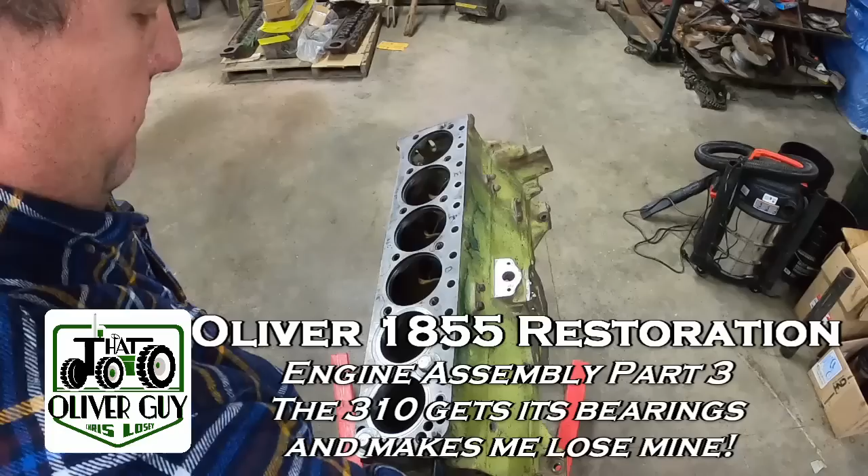Welcome back. We are going to do some bottom end building now.

Waiting for lube for those sleeves, which you probably saw in another episode. So I can put those in after the crank's in. It should be fine after checking everything else out. And the way these two popped in, I have no doubts that everything's going to go together well. I should probably lock this from turning.

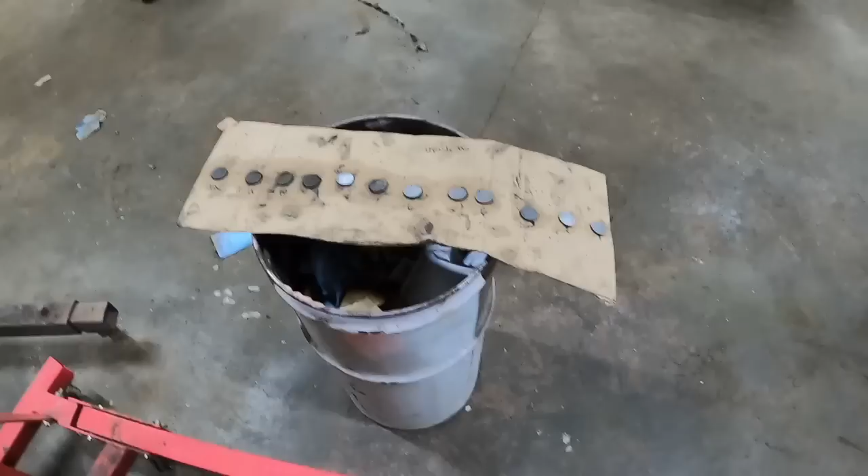So it's a lot easier to get the lifters in without the crank in the way. So we'll get the lifters in, then get the camshaft in. And I gotta clean the lifters. Generally I don't do at least the final wash on parts until I'm ready to put them together, so they're good and clean. So I'll get on that and then we'll start sticking them in there. The camshaft measured up good, so I didn't do anything to that other than clean it.

So kept the lifters in order, and that way they work against the same lobes that they were before in case there's any wear patterns or anything like that. Just took a piece of cardboard, punched some holes in, and put lifters in. That helps keep them organized on the cheap. So I'll wash up number one and then we'll put her in.

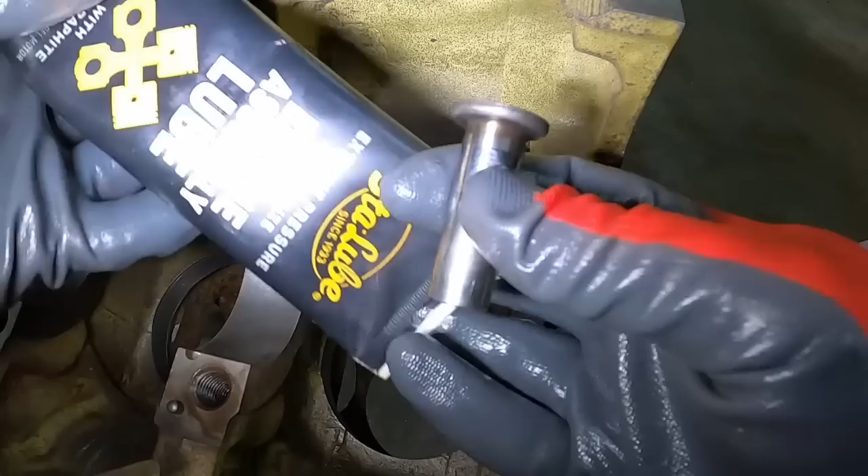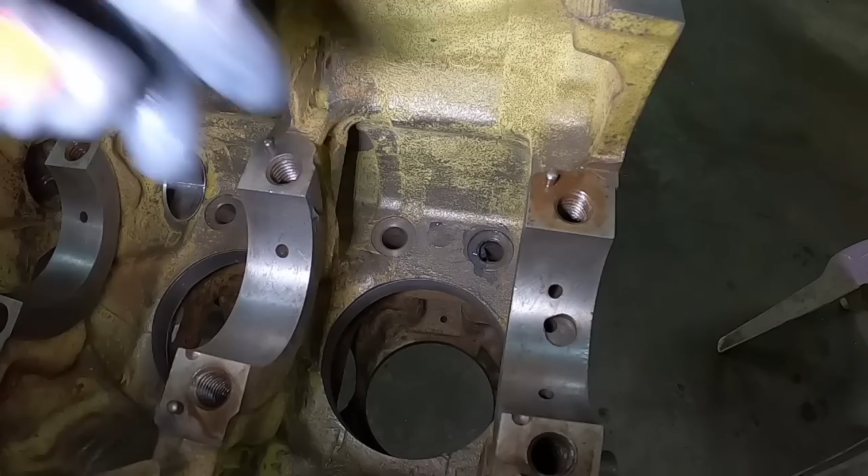Oh, I've got this, I like this one for the lifters just because it's almost grease. So it's going to stay in there. Cling on good until the oil gets circulating around in the engine. Maybe I'll put some right there for that initial startup. Now it's all slippery.

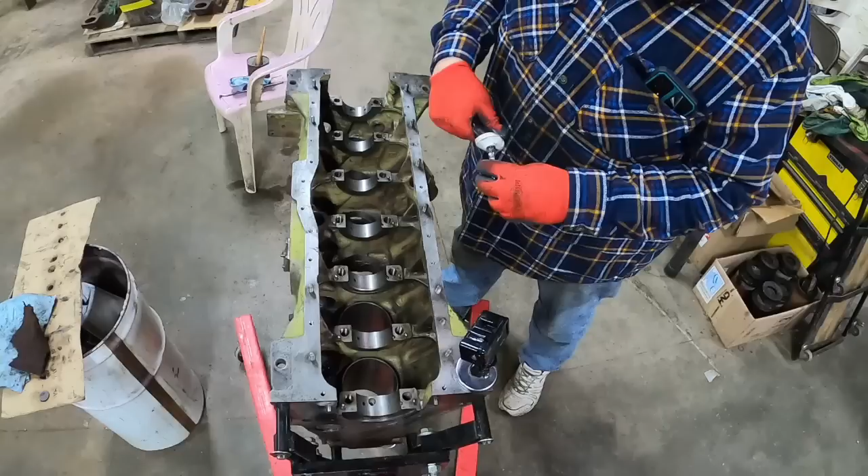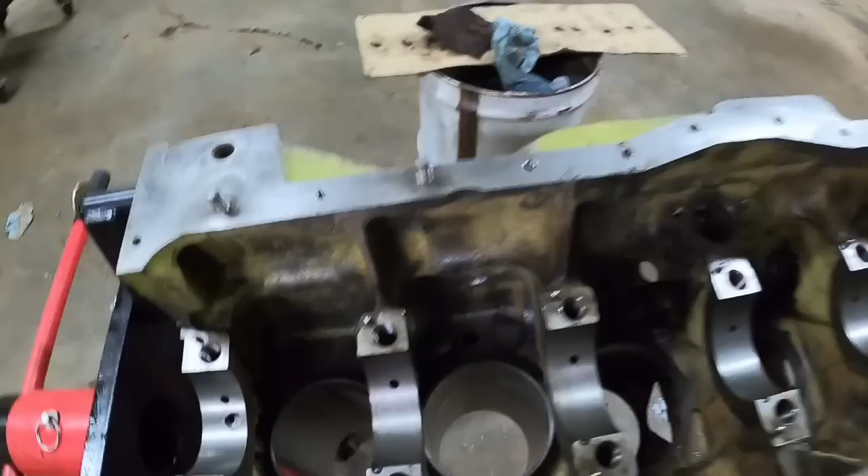Next, probably not going to see much, just because I keep getting my hand in the way. So I'll record these first two going in, and then you'll have to take my word for it on the rest, I guess. I'll put a dab on each lifter, and then in on each bearing I'll coat that. Then I'll coat the camshaft before I slide it in.

Oh, here is, this is the gear that drives the oil pump. I definitely want to make sure that's lubed up ahead of time. It'll be sitting down in there once it's all assembled. I'm going to put lube on every lobe, smear some on the bearing areas. That is in. All lubed up.

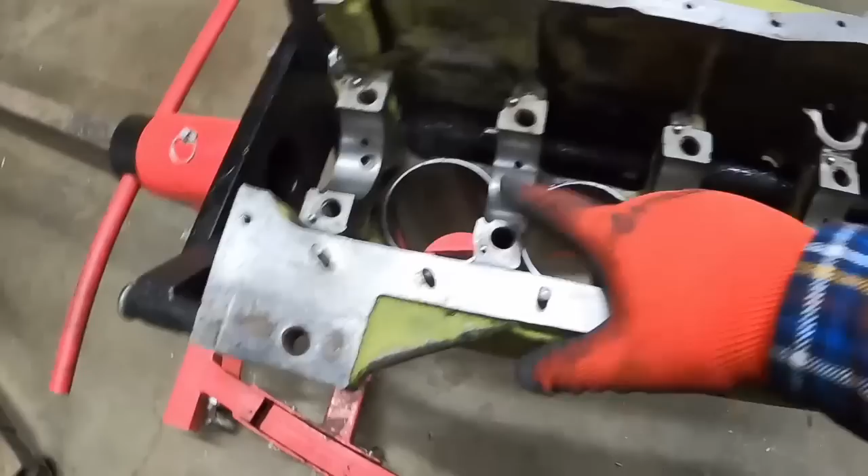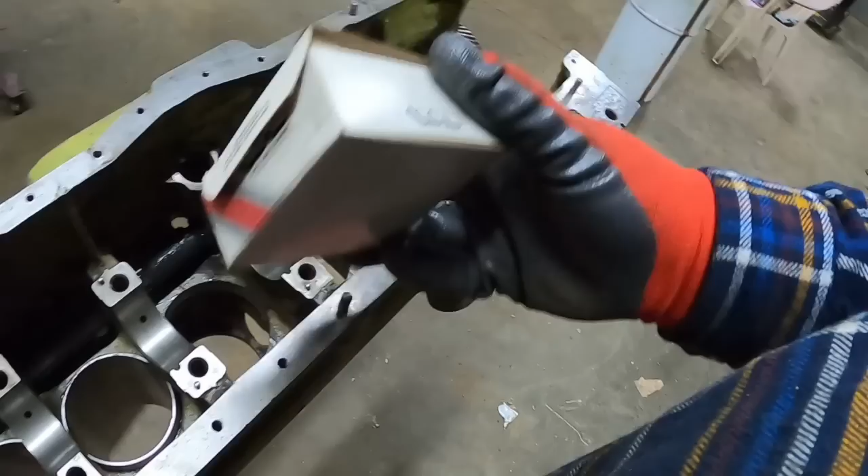Crank got ground to 20 under, and Larry's Valac down in Texas had a set of new old stock 20 under bearings, you know, from the good old days when stuff was made in the USA. Of course I say that. Let's see what the back of the shell says. Let's see, 20 over Oliver, or no, Clevite. Doesn't say if it's made in the USA.

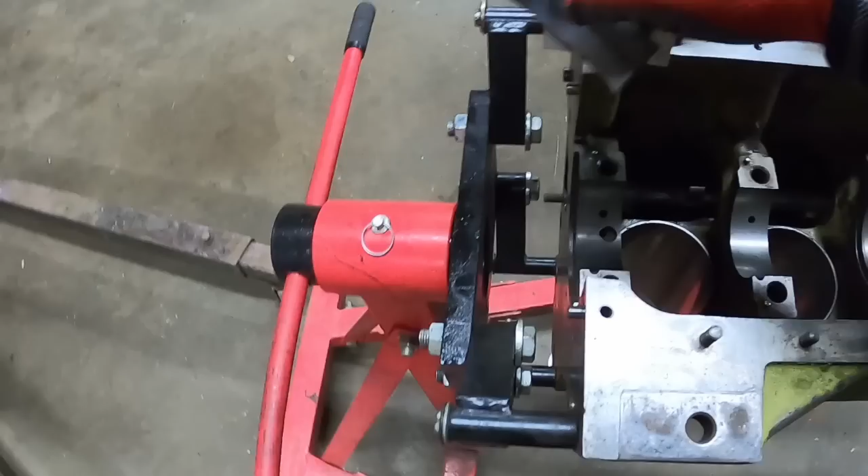Well, that will be the bottom half because it has no holes in it, which is currently the top half. Looks like they need a little wiping off. So I will number these just to keep the two halves together. We'll Plastigauge them before it's all said and done. Tang there. One more check for any foreign stuff. Even a little speck of dirt can push that bearing up 1/1000th and make it start dragging.

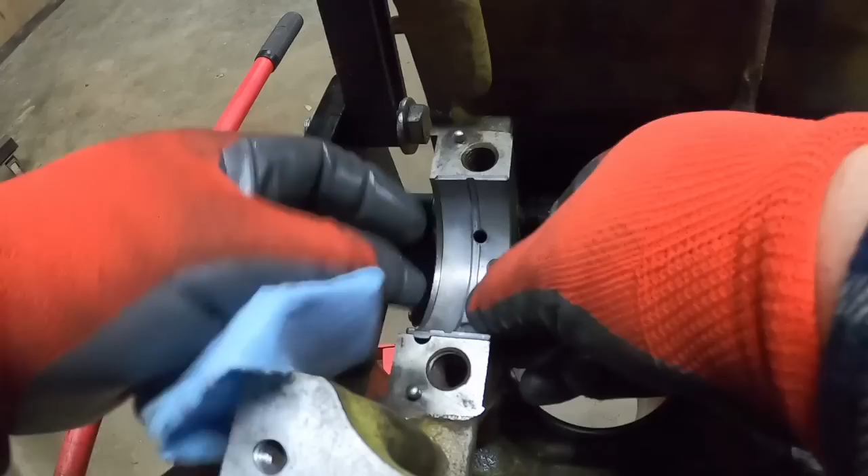Okay, the holes should all line up. They should. Now this has got a countersink hole, so that'll let oil through there. So that'll be okay. Let's line it up. And there's a hole there, but it goes to nowhere, so that's fine. So I'm gonna write 7 on the back of this one. Keep them paired up.

If I was really doing this right, I would measure the bore with a bore gauge, and well, mount the bearings in, clamp them down, measure it with a bore gauge, measure the crankshaft, and then the difference is my gap, my tolerance, my space, whatever. There's got to be some space for oil and for it to turn. But I'm gonna lean towards that they knew what they're doing, and we will check it with Plastigauge, which we'll see how that works here in just a moment.

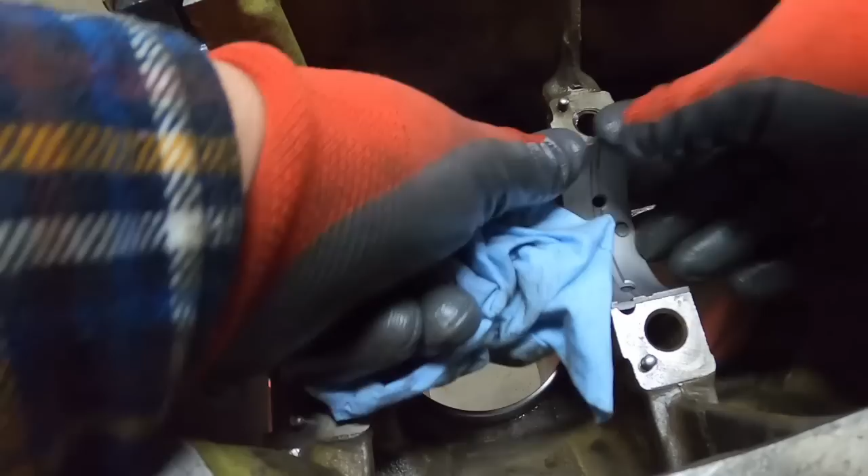Next up is the thrust washer, which wraps around and takes up the end play or the thrust of the crankshaft.

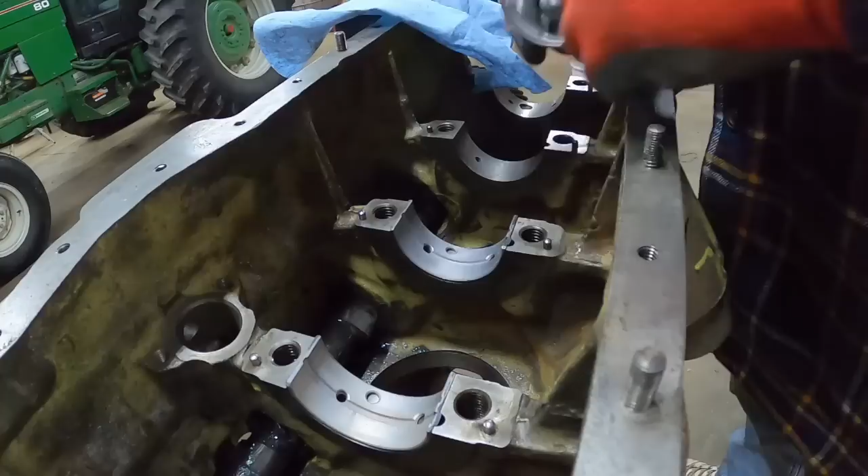It does say upper, which looks like lower because the block's upside down, but... Oh, I use this Permatex Ultra Slick for the actual main bearings and rod bearings. It's pretty darn thick and sticky. Used to use engine oil, but I just like this stuff, the whole sticky, staying in there, staying where you put it.

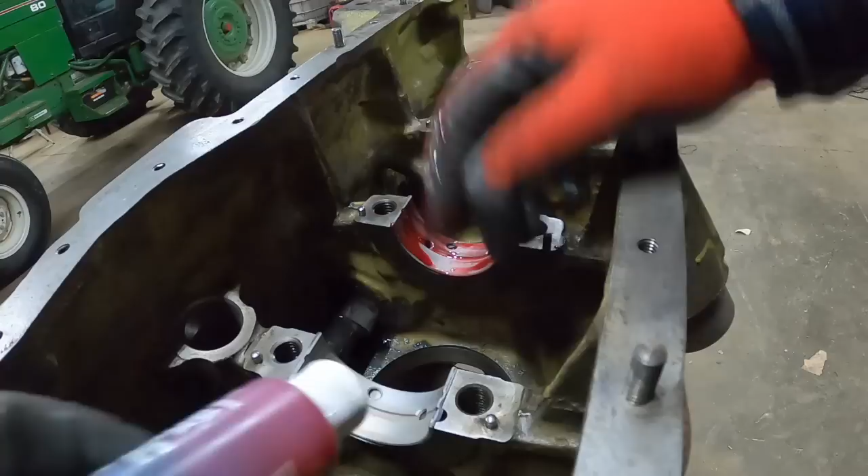It's a little more fluid than that gray stuff that I put on the cam. So I figure it won't make for harder cranking when I'm first trying to fire it up. It's sticky. That's what we want. Want it to stay in there as long as possible until the oil gets flowing. Gotta get the sides of the thrust bearing. Okay, let's move you guys up out of the way so I can have plenty of room to set that crank in there.

And I might as well get the camshaft timed up. There, just had to break that suction. There's the C there. And I missed. And I missed again. That time she lined up. C to C. Oh. C to shining C.

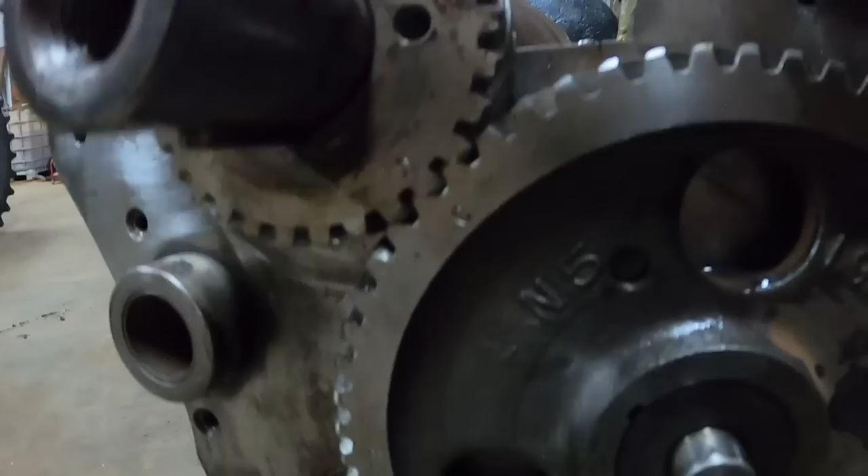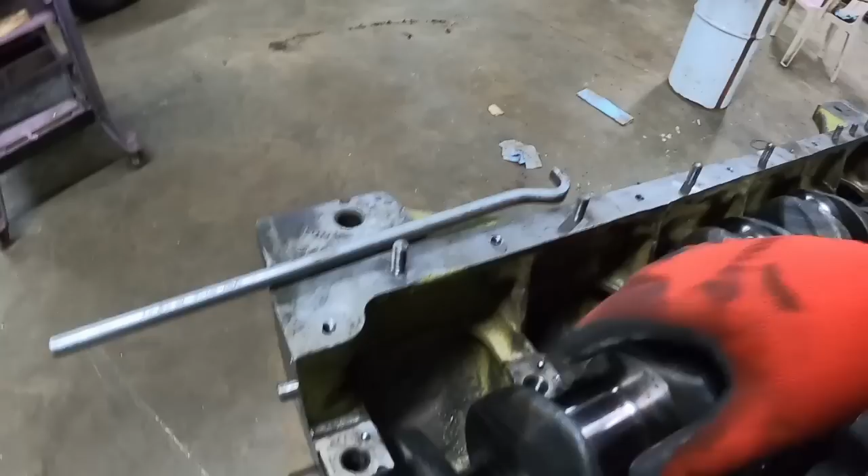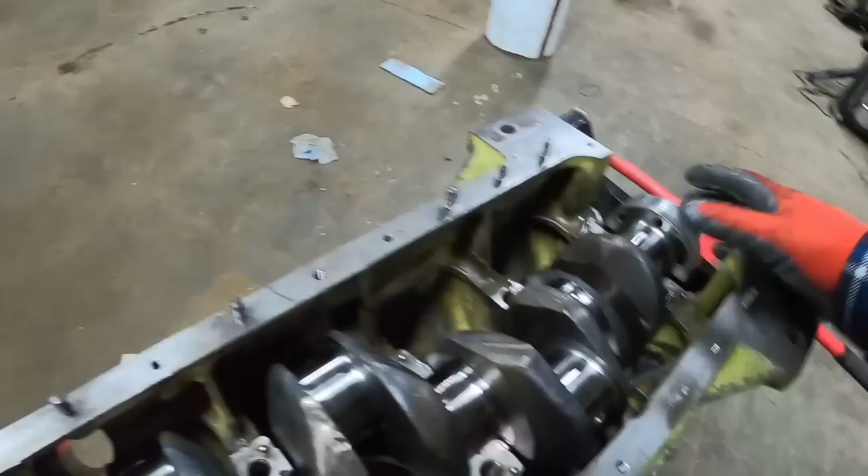All right, now the next process of starting to Plastigauge. We will start with the thrust bearing, and then I can check the thrust clearance on that, the end-to-end play, before we get any farther. So far, so good. It turns. So clearance is supposed to be 1.5 thousandths to a max of 4.5 thousandths. So I've got red Plastigauge, which goes from 2 thousandths to 6 thousandths. And I guess if that doesn't come out right, we'll throw a green one in there.

But what it is, if I can get it open, is a piece of plastic, and we're gonna gauge with it. You break a piece off, and you set it in there. I like to run it a little bit of a diagonal, get a little more space. And then we need to get the bearing in the cap the right way, so the tang is engaging there. I want to watch the dowel pins, line them up. I'm going to put a little more of that sticky lube on here. Then we just set it on there and torque it down. And I should have left well enough alone because it stuck to the bearing.

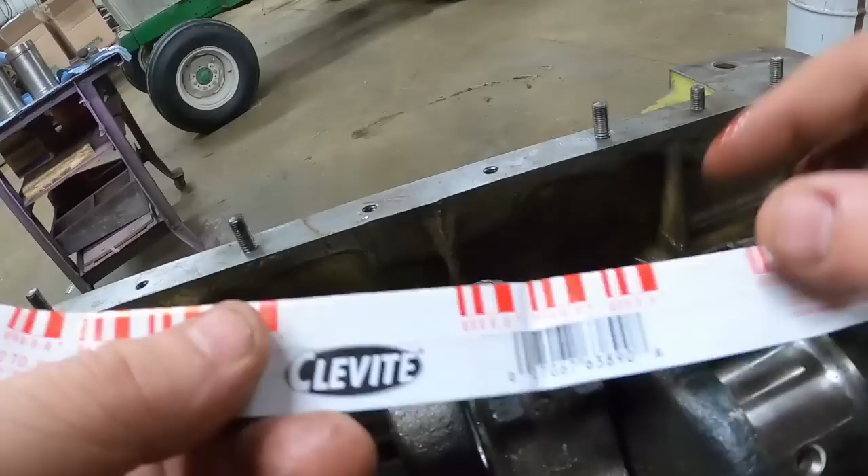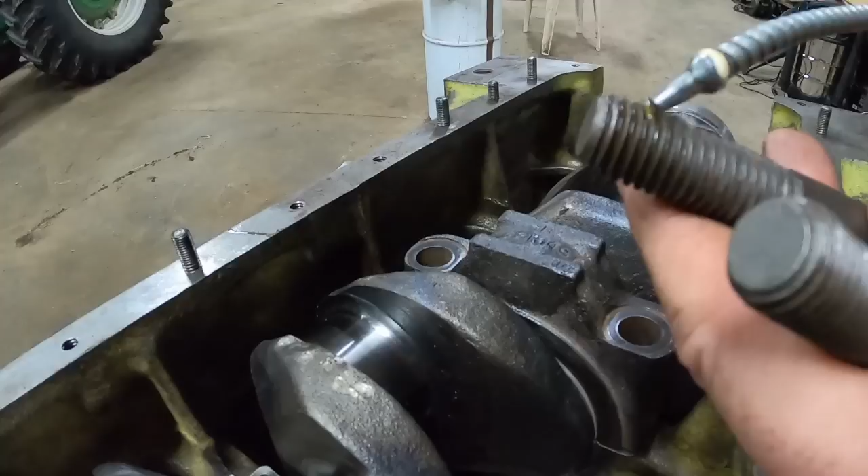What will happen is as that gets clamped down, that plastic will get squished out. Then you just hold this up to it, and however wide it is, is how much clearance is in there. The tighter the clearance, the more it squishes it down and makes it wider. Pretty simple in concept. So let me grab a couple bolts and look up the torque for that, and we'll get going. A little engine oil on the threads to lubricate those.

In an effort to make this a little quicker for now, I will use the good old-fashioned bar. Book says 130 foot-pounds, 129 to something slightly higher than 130, so I'm just going to go for 130. There's 120. 130 there. And 130. Now we go back the other way. See if my torque wrench shows in reverse. It should. That's weird. It only took like 120 foot-pounds to break them free.

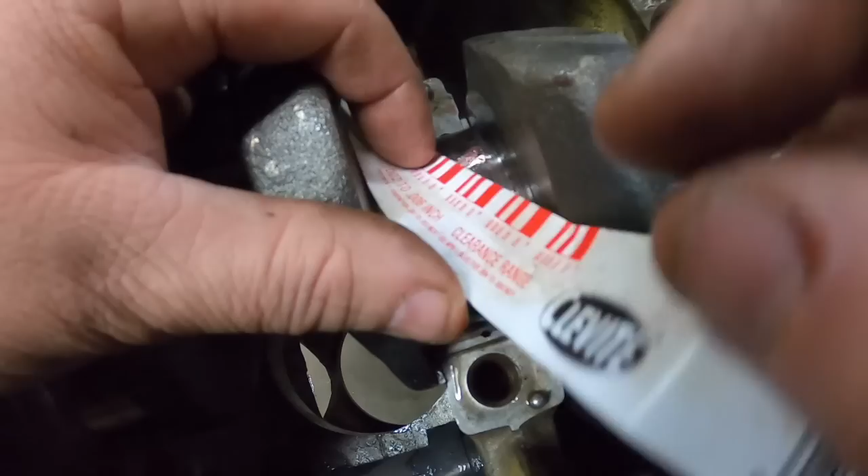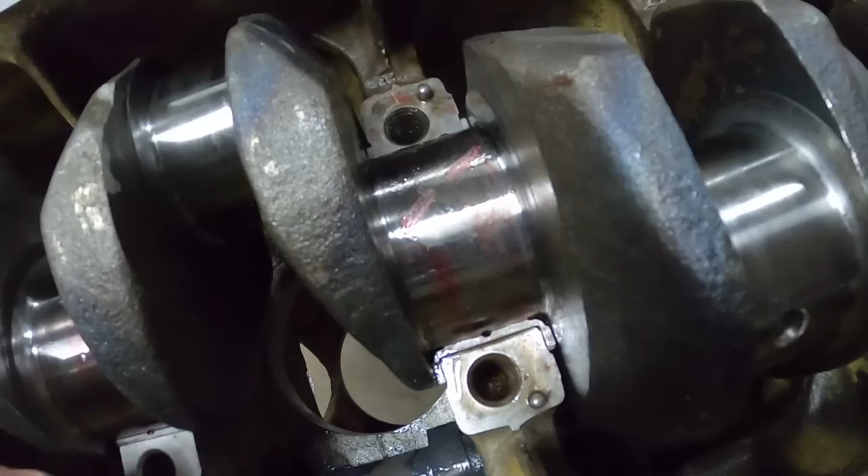That's good, because 1.5 was the tightest that they recommended, and up to 4.5. But the bigger the gap is, the more the oil can slip out, so you want to keep it to the tighter end of things. So now I got the fun job of peeling that plastic off from there; fingernail works best because it ain't going to scratch the metal. Cleaning that up. There's some stuck to the bearing too. I saw it when I pulled the cap off. So I'm very happy with that clearance.

What do I do with my paper towels?

Just a little bit left on there. So, got the Plastigage scraped off from there. It likes to stick to the bearing more than the crank. Took a little bit to get it cleaned off, but I didn't want to damage the bearings, so I just keep working at it. 130.

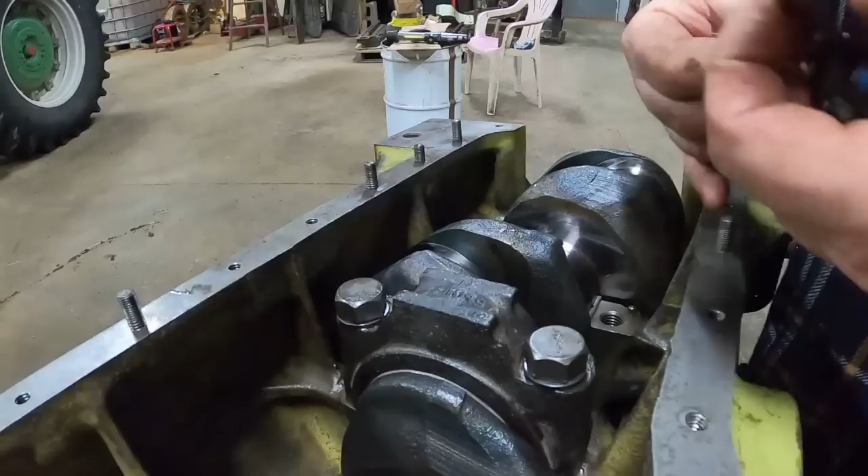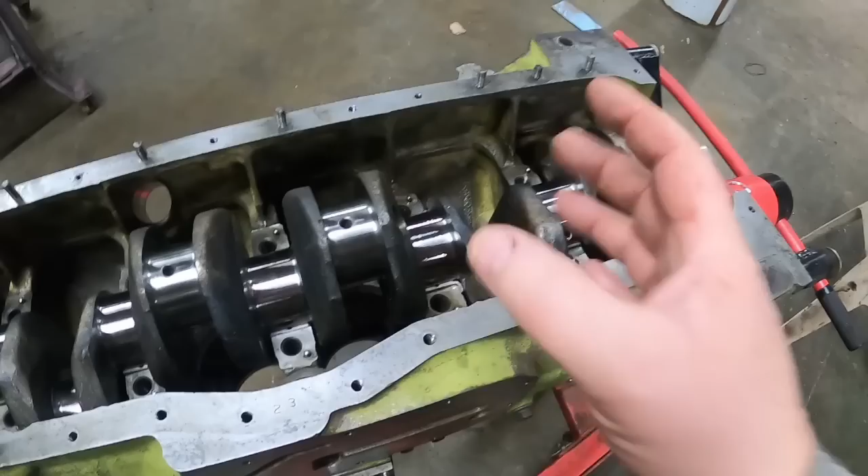I was a bit concerned about the amount of end play, and so I got checking, and there were 2 different sizes of thrust bearings. Well, obviously more than that, because you could have 3 thousandths under, 10 under, 20 under. These are 20 unders, but the thrust width could be 2 different widths, essentially to give you a second set of bearings in case your crank got a little rough on the thrust surface. You could have that ground.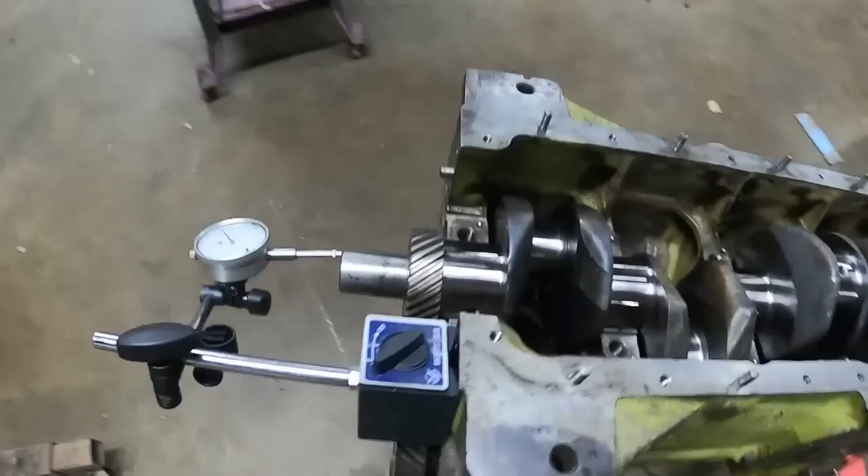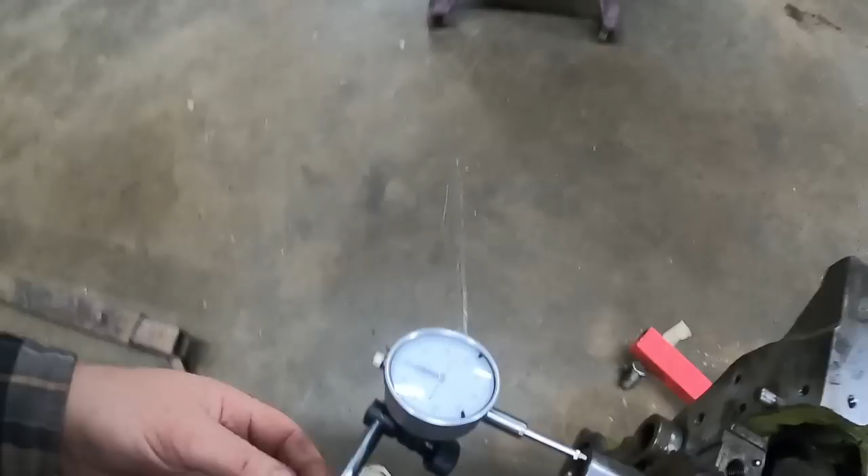So I decided to put the dial indicator on. Let me get the screwdriver. The cap's off now, so it might go a little farther, but which direction am I going? It's already forward. So we're looking at about 16 thousandths there. Oop. Well, I guess it's a little more than that. Zero that baby out. And I might be getting just a hair more without that bottom shell in there to control it as much.

But I'll put this in here and push her forward. Yeah, I'm getting more now with the cap off than I was before. I should have recorded then. But I was getting about 16 thousandths right on the money if I really push. Yeah, it's actually just about... I guess I shouldn't try to force it so much. Or put the cap back on for demonstration purposes.

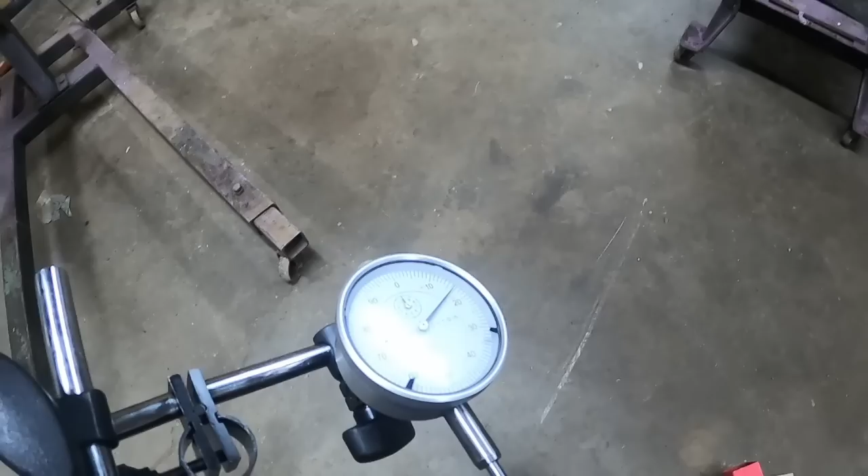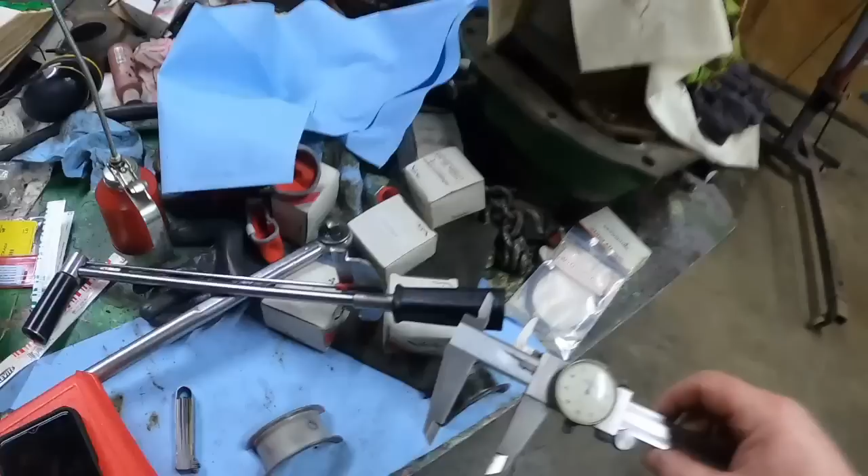But this is why we check these things. Yeah, without pushing it too hard, I get to about 16 thousandths. Somewhere in there, which is not acceptable. They say 11 thousandths max. So I break out the, let's see, trying to do this with not enough hands. My old thrust bearing, I'm glad I kept it. It's coming in at about 1.496.

And this is supposed to be the over width. I don't know. So the box is marked right. The 33, wait a minute, 310, is that 310 or 300? 9984 is supposed to have the wider face. And this one's just coming in at 1.498. And if we look up on AGCO's website, we've got the 20 undersize, which is 1.495 to 1.498. So my old one wasn't in too bad a shape.

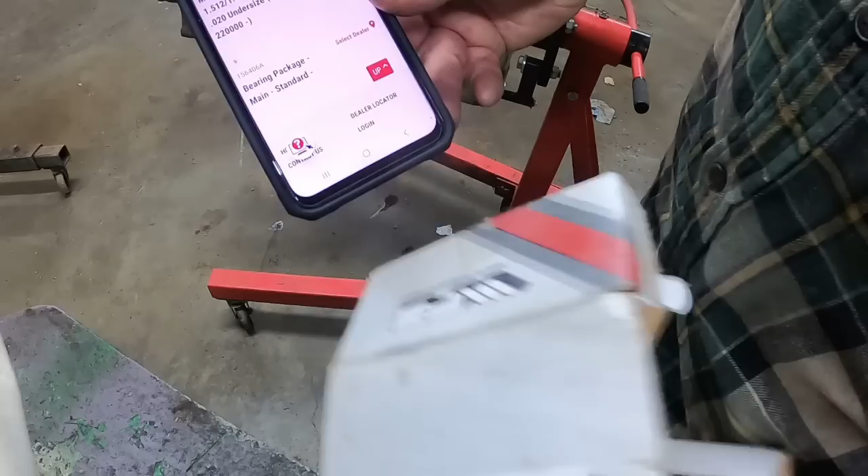And the new one there that is supposed to be 512 to 515 is definitely not it, because there's my part number, 3109984, on the box. So I'm not blaming Larry on this. I think someone switched it on him because, oh, this is the new one, and it looks like it has a date stamped in it of 01 of 16, which would put it a lot newer than that box. It also doesn't have the Oliver White part number stamped into it, which all the others do.

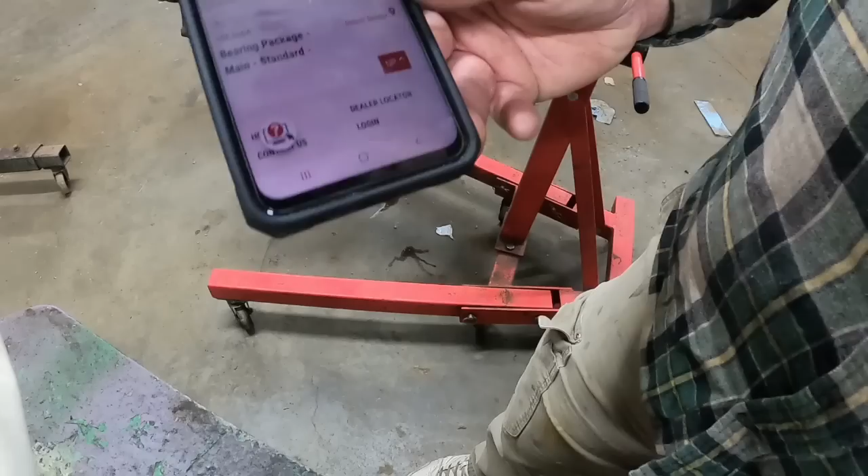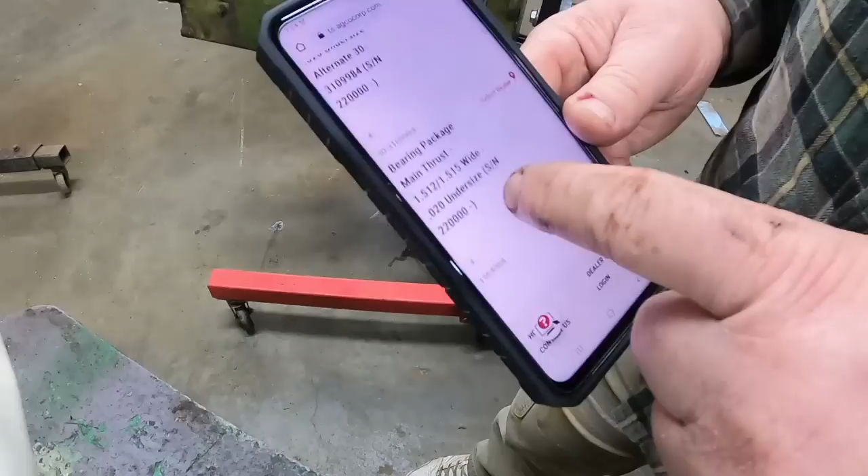So here's the old one. That's got the part number stamped into the back side. So I think at some point someone borrowed them out of that box and put them back in. It's the right bearing if the crank was ground for the narrower width. Obviously my crank shop went with this wider number. Fortunately, I have been able to locate another set. So I am going to order those.

But that pretty much grinds my engine building to a halt. I ain't got the lube to put the other sleeves in. That should hopefully be in today. It'll probably be Friday. If I order, what's today? Tuesday. I might have this bearing by Thursday. There's plenty of other stuff to work on, but this engine just seems to slow down.

But this is why we check those specifications. I'm glad I did. Take it for granted and just throw everything together, and you find out where someone slipped something different into a box. So yeah, if this is coming in at 16 thousandths, 17 thousandths maybe, and we add that thicker one on, she should be pretty good. Let's see.

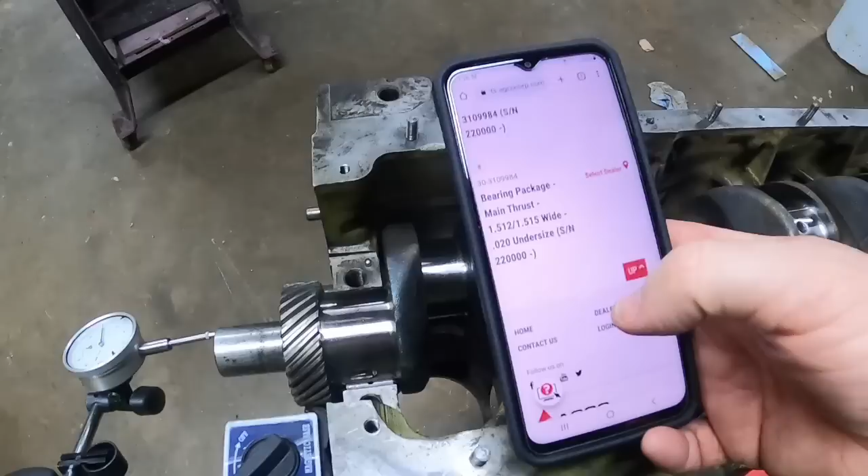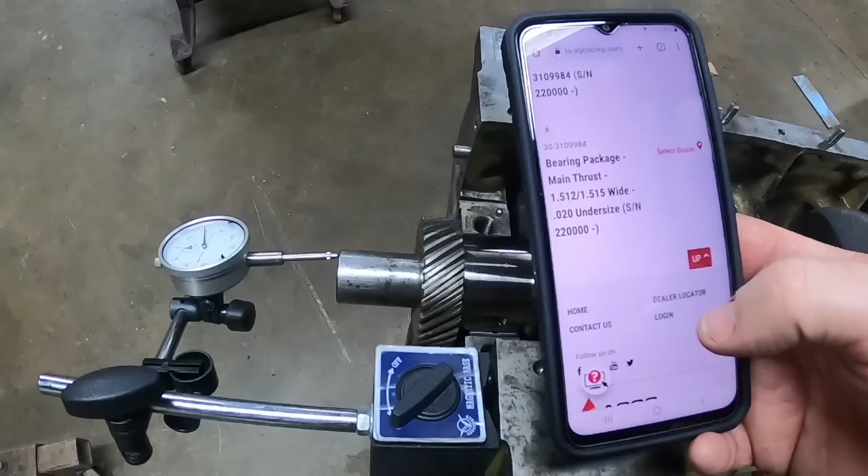Oop, I turned it. Now really getting it over there puts it almost to 20. That was what, 5.1 something, 512 to 515. So 498 to 515, that's 17 thousandths. Yeah, that's going to get her right back down to a couple thousandths, which is the tighter end of where they want the thrust, but is acceptable.

So that's a bummer. No harm, just a delay. This is, like I say, this is why we check these things. Maybe I'll clamp that back down real quick just to double check it with the top on. Hold on.

Okay, cap is tightened down. Take it easy, go. Yeah, that way. Yeah, I'm getting about 17 and a half. So yeah, that's gonna put her about 2.5 thousandths with the right bearing in it, which is, let's check the book. Crankshaft, main bearing, crankshaft, end play. Oh no, they want at least 4 thousandths.

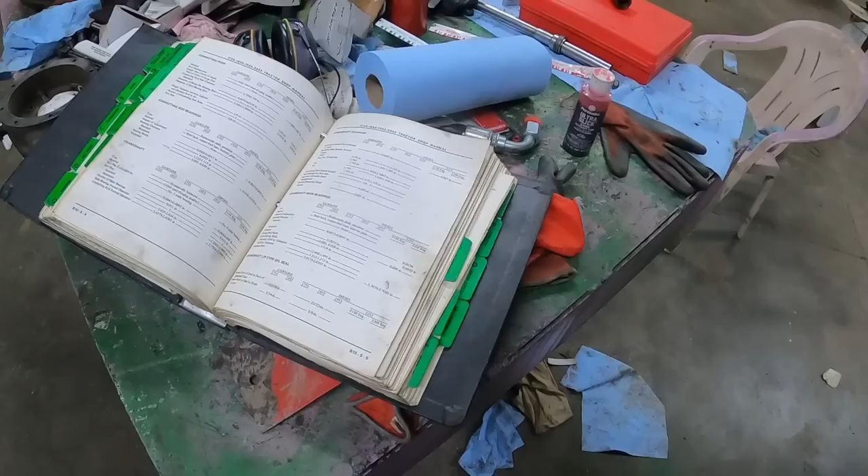I guess it depends. If it's wide at the 15, if it's 512, then we're only talking another 14 thousandths. Yeah, if I hold a little pressure against it, yeah, it's about 17 and a half. Let's go back the other way, hold a little pressure. Look at that, I already knocked it off. Maybe I better mount that a little better.

So yeah, I had a loose nut there on the back of the dial indicator. My bad. But pretty much 18 thousandths. So depending on how that new thrust comes in, its tolerance, it should be about right. It could be just a skosh tight. But I guess we'll cross that bridge when we get to it.

Never a dull moment. Well, at least if it's tight, we can grind a little more off. When it's loose, that's a little tougher to put it back. The new bearings came, replacement bearings came. Let's see what it measures up at. 515. The upper end of it. That could be tight. Yeah, this one's at 515 as well. Which, you know, they're supposed to be a match set, so that's good.

Then there was the older 156-630AA. Even came in a nice Oliver box. They're that new old stock. About the biggest difference I could see is these have the brass, bronze, copper, or whatever face for the thrust face. So that's probably the biggest difference between them, the facing material was updated. Let's see what the width is on this. Yeah, this is coming right in at 515 as well.

So I guess the proof is in the pudding. I will put it in, but I have a feeling that's going to be just a little tight on the tolerance, which is a pain in the butt, because then I'll probably have to send the crank out and get it ground. But ain't no point in doing that until we put it in there and actually see.

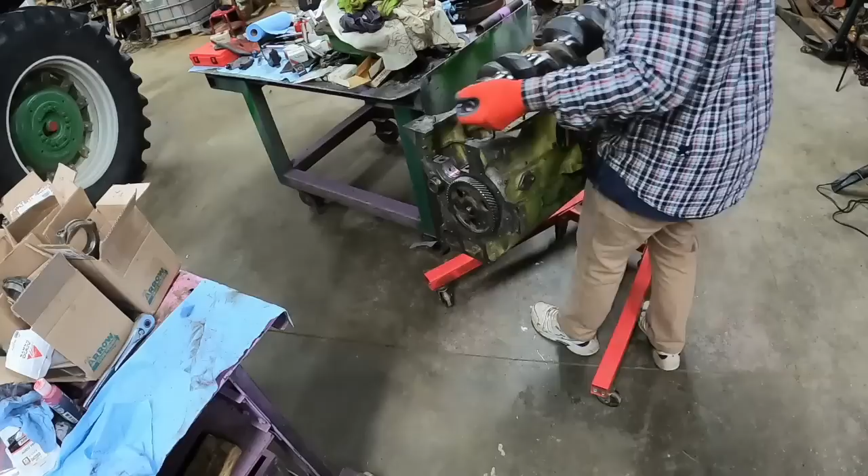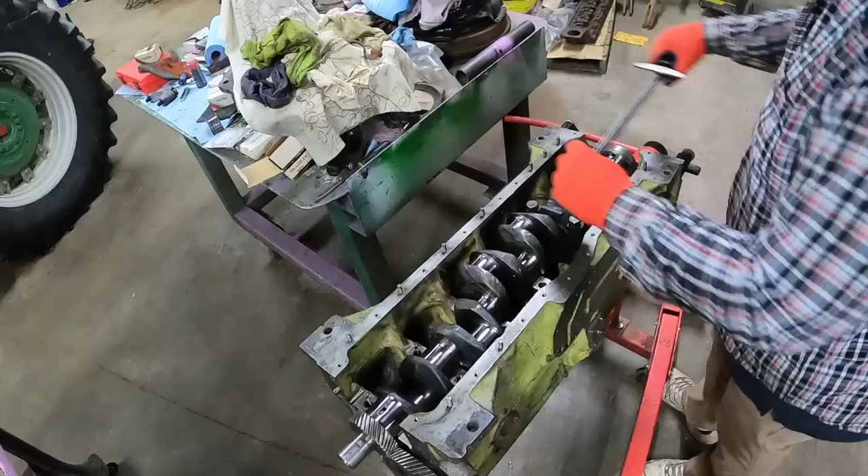At least it turns with that thrust. Granted, there ain't a cap on, but oh, where'd my C marker go? Get a thrust cap on there and we'll start checking some tolerance. Click. Probably should put some Plastigauge in at the same time, but first thing I'm going to do is check the end thrust. So, well, it's not so tight that it can't turn. That's a good sign. It's a good start.

I'll start with a feeler gauge. Okay, 4.5 thousandths is its minimum. There's 5 thousandths. Let's see, we want to go this way. Oops. Boy, it's just going down in there at 5. I think we're going to have a winner.

We'll set up the dial indicator just to be safe. Boy, I'm only getting about 2 thousandths on the dial. I mean, that's still clearance, but it's tighter than they call for. The obvious thing would be to send the crank in and get a couple thousandths ground off. Probably 3 thousandths just to be safe. That'd put it well in the range. So yeah, it's barely 2. I think I'm gonna call my machinist and see what his opinion is.

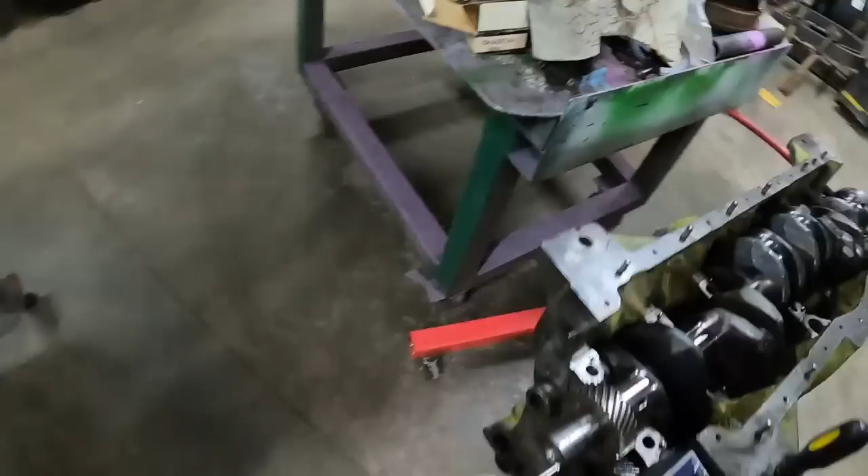Well, I got off the phone with the machine shop guy, and I was kind of thinking this, and he affirmed it, that essentially I need to lap the thrust bearing. This is an old one, but get a good flat surface and basically just try to knock a couple thousandths off.

And I'm sure some of you are going to be loving that one, but he said the biggest thing is when he didn't grind cranks, but the guy that used to grind my cranks and did a fantastic job and unfortunately is no longer with us, he said what he'd do is they touch the crank and then go over and hit the thrust faces and then do the journal.

He said, so if we took it back in just to try to get like 3 thousandths knocked off, it probably would do damage to the face of the crankshaft, and then they might have to regrind it and go to 30 thousandths under. And he's done this trick before on a foreign engine that they couldn't get the right bearings for, or the tolerances were real close, just needed a couple of thousandths extra, and it worked fine. And that's what the old timer crankshaft guy recommended.

Just the way things are done, he said it was better to try to knock a little bit off from that thrust face than try to knock a little bit more off the crank. So that's what I'm gonna do, and you can argue about it in the comments. So now I got to find a good flat block to do this with, and at least I got a good set of calipers where I can keep measuring it rather than sticking it back in and out.

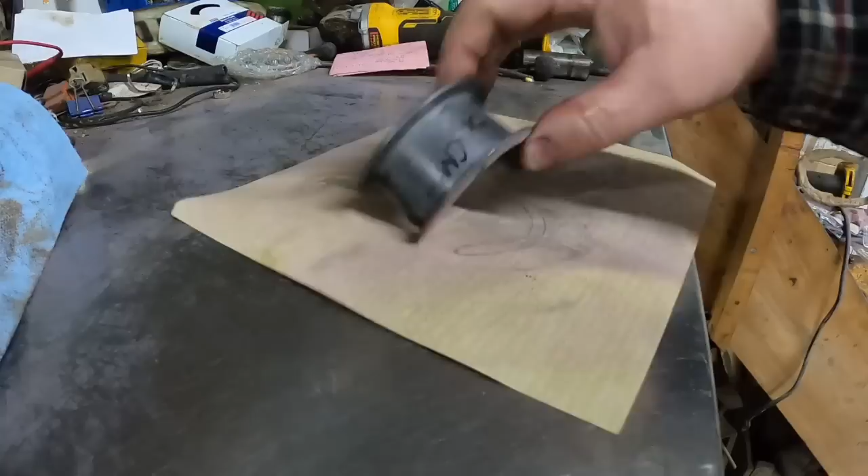So I have identified them. This one will be the cap side, so that makes this side the front. This one will be the block side. That one's the front. So I'm going to work on the front on both of them. And that way I don't have to worry about, did I take more off from one side than the other? Plus the back side is what's going to take most of the thrust every time you push on the clutch pedal. So leave as much meat back there as possible. Check my bench top here. It's good and flat and solid.

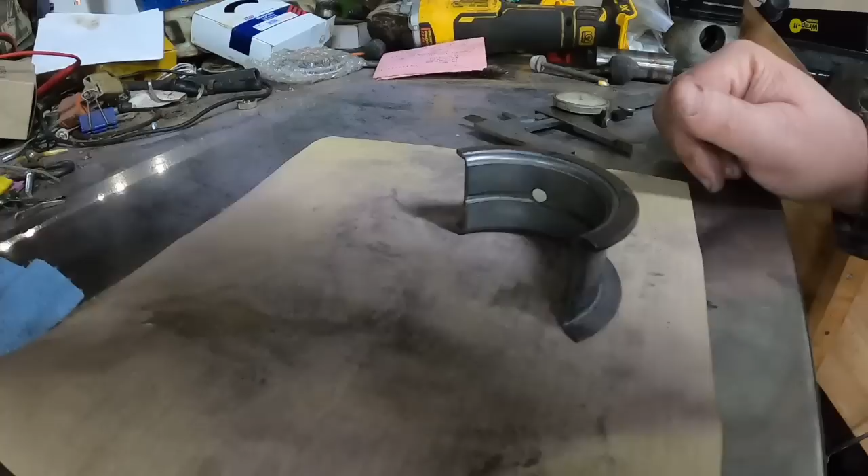So from there, I'm just going to make a figure 8 pattern and keep working at it. Figure 8 pattern kind of helps make sure I'm not favoring one area. I guess the upside is there are more of these wide thrust 20 under bearings where I got this one. Whoa, he's right. It doesn't take long to take off a couple thousandths. That's 511. Thought this was going to take longer. Yeah, I must have had that in a notch. 512, so it could use a little more off. But yeah, that ain't taking long at all. Try to knock just a little more off, and then I've got the 1000 grit. A little bit smoother to polish it up a little finer, but it's really not doing her too bad.

Okay, I got this one to 510. So I got a little carried away. I was going for 511, but that still leaves me plenty. And it seems to be consistent. Yeah, 510 there. 510 there. Oops. There we go. 510 there. So I think that one's good. Here's the block half, front this way. Let's check it again. Yep, 515. So we want to knock this one down to 510.

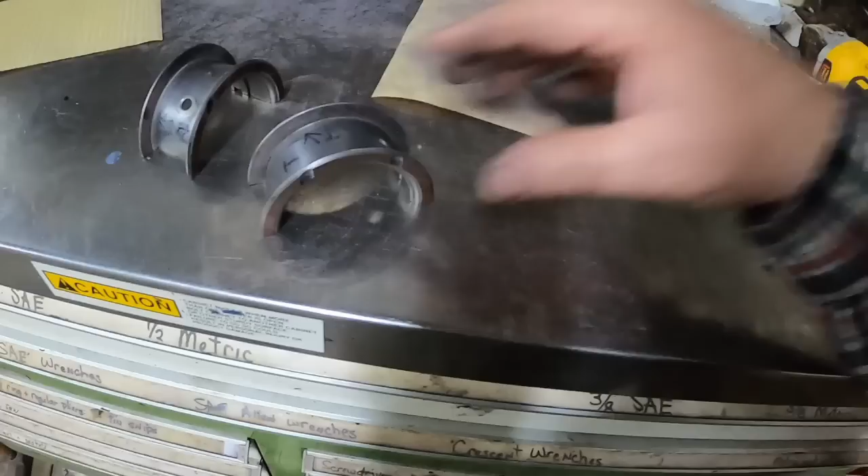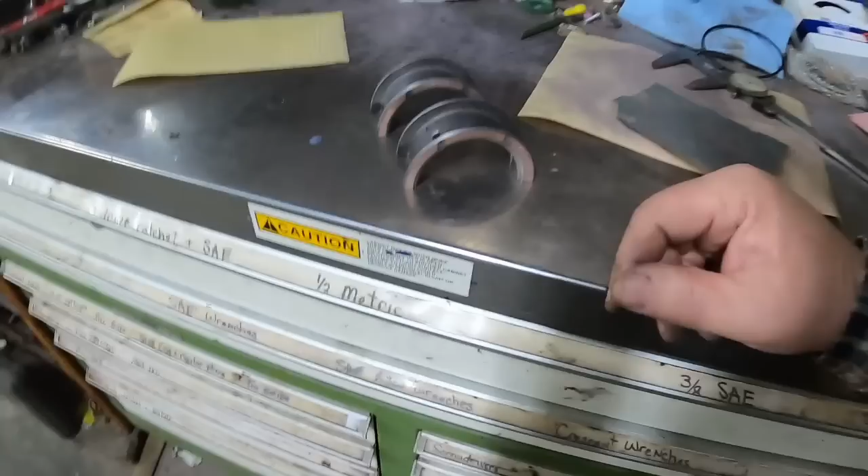Well, that didn't take long. They are now 1.510 wide, and making sure they're consistent. You wouldn't want it wide here and narrow here. It's gonna put all the thrust in one spot. They seem to be pretty darn consistent. Well, so I guess now the thing is to put them in the block and see how they measure up with the dial indicator. That went quicker than I thought it would.

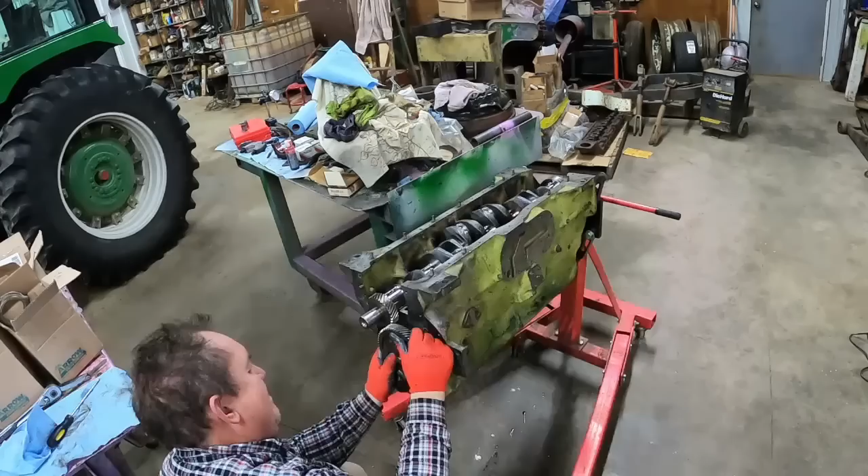Okay, hopefully this is the last time this crank goes in. Let's see how close I hit the timing mark. First try for the third time or more. Well, let's get that cap on and tighten her down, and then we'll check her with the dial indicator.

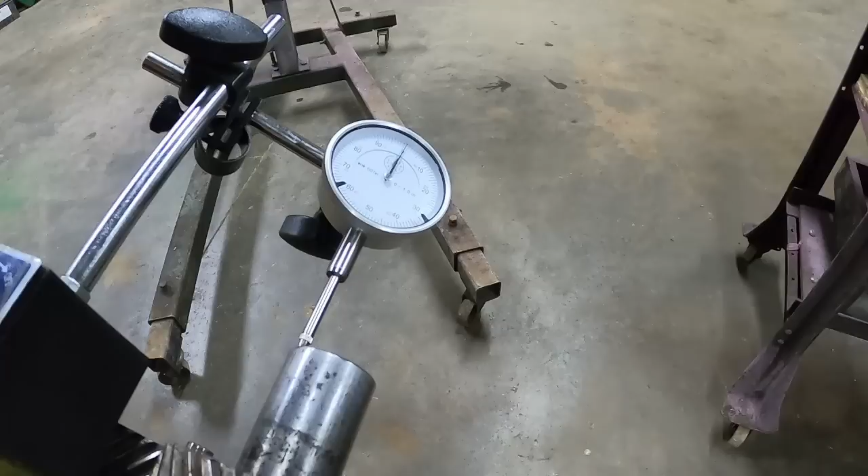I think I nailed it. It's like about 5.5 thousandths. Yeah, it takes it back to 0. Minimum of 4.5, maximum of 9, or the range of 9, and the very maximum is 11 thousandths. So I would say 5.5 gives us enough room for expansion and oil, but not so loose to let too much oil go by. Call me satisfied, and argue about it in the comments if you have to.

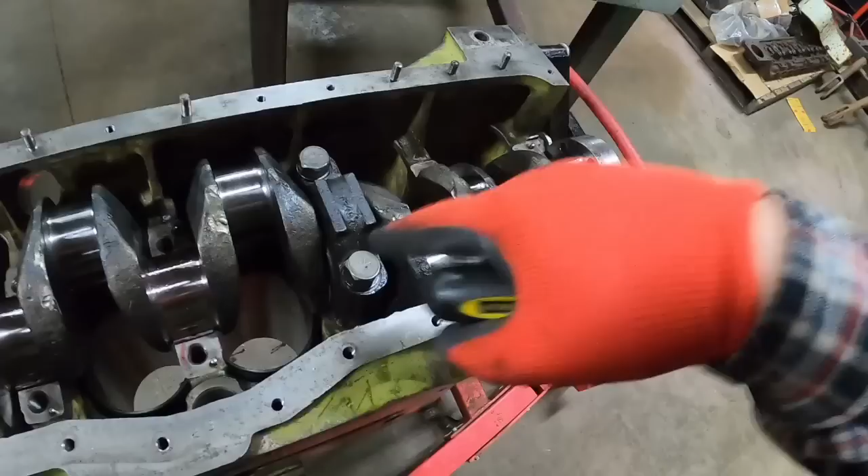Now I need to Plastigauge. That'll probably be the next thing. It turns smooth, so I think it's going to come out, but Plastigauge that and make sure the other tolerance is right on it. I'd say that's just a little wider than the 3 thousandths mark. Not as wide as the 2. So somewhere between, and it's a little diagonal. A little between 2 and 3.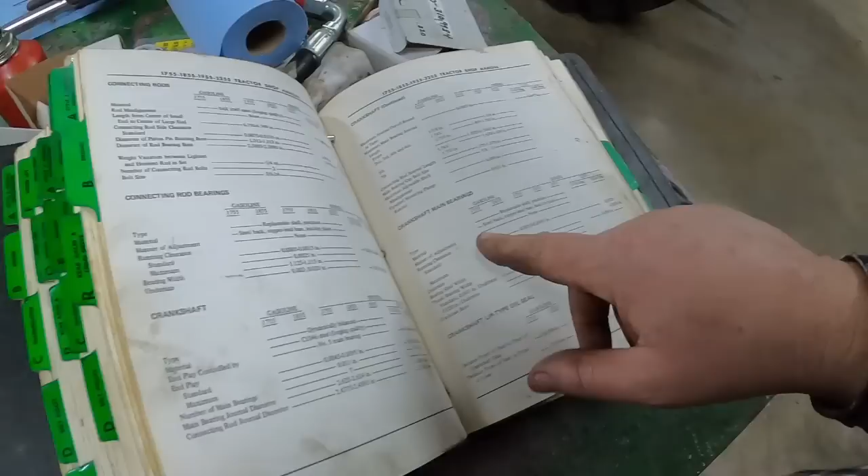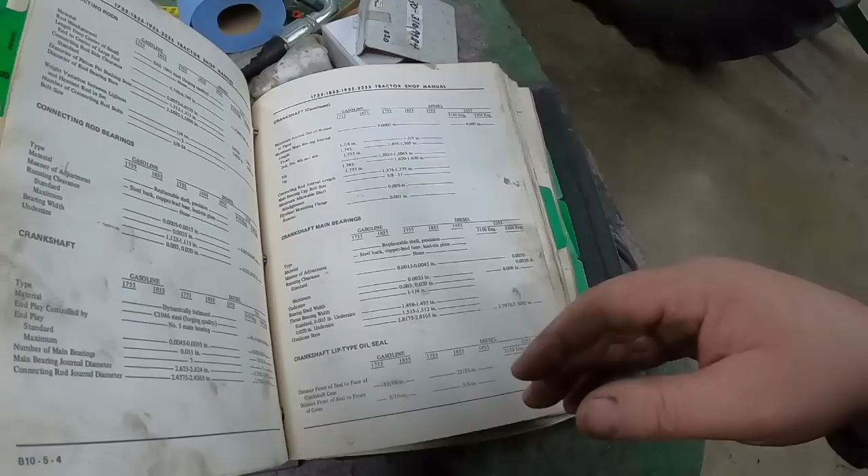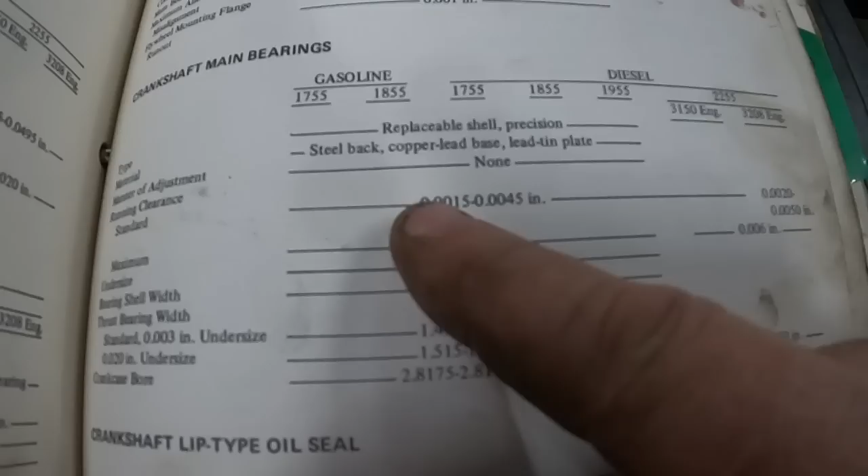And what did I say the spec was? Engine. B. Connecting rod bearings. Oh, no, that's connecting rods. Crankshaft main bearings. Running clearance. 1.5 to 4.5. So that's well within the tolerance, and not towards the loose side either. Probably somewhere up in the 2.8 range. I don't know. Less than 3, definitely more than 2. So 2 and something. So yes, excellent. Hopefully this is showing that. 0015 to 0045.

Well, that seems like a good point to go get some lunch. It's finally starting to go my way again. I probably shouldn't jinx it. The ice maker probably stopped working again or something.

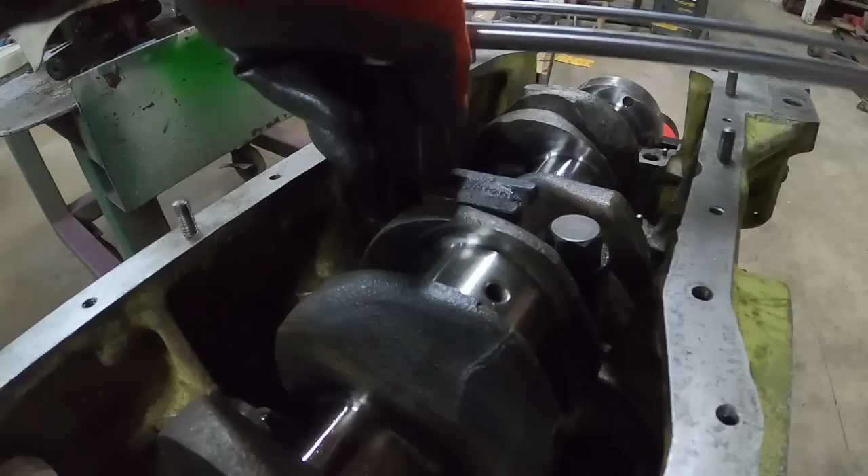Well, we're gonna try out my new torque tool thing. Actually, I've had this for a little bit. I think I have used it before, but I know I've used the 3/8 one. Okay, this is with the good old bendy bar type. I'll try to get as close to 130 as I can. That should be about it. Then I have this baby. I got it set for 130. It should show me as it's coming up.

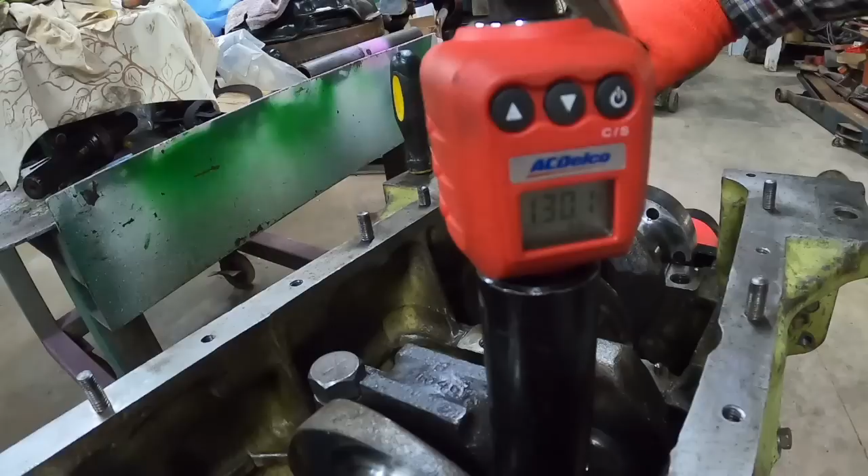120, 126, 129, 130. It felt like it moved ever so slightly. So I would say the other one was pretty much on. I'll see if I can get it facing you guys. Yep, it shows me I hit 130.1. And then I think I have to hit power to clear it off. All right. She starts going up. I get close. When it stops beeping, yeah, I got 130.3 that time. Felt like it moved ever so slightly, so go. I like that.

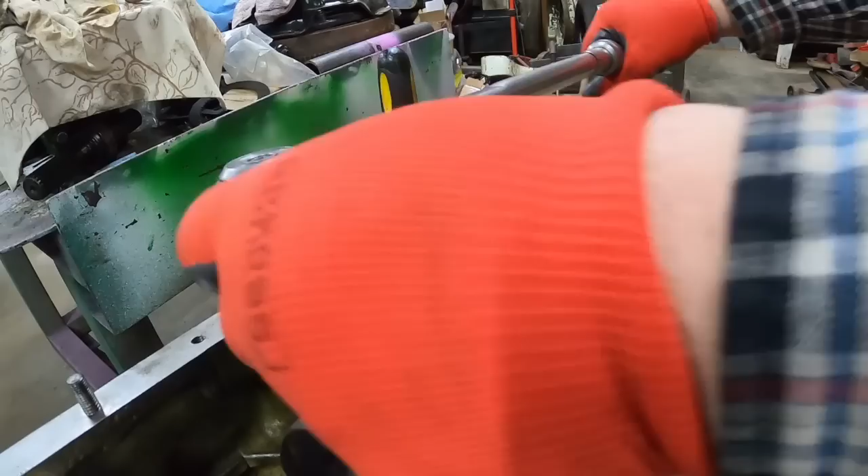We'll hit her with a clicker one just to see how close that is. Well, it didn't move. Yeah, if I pull on her just a little extra, it moved just a skosh, so I'd say they're all pretty accurate. They're all giving me the same reading. But I'm going to use that digital one because I like it. Got to 132.5 on that.

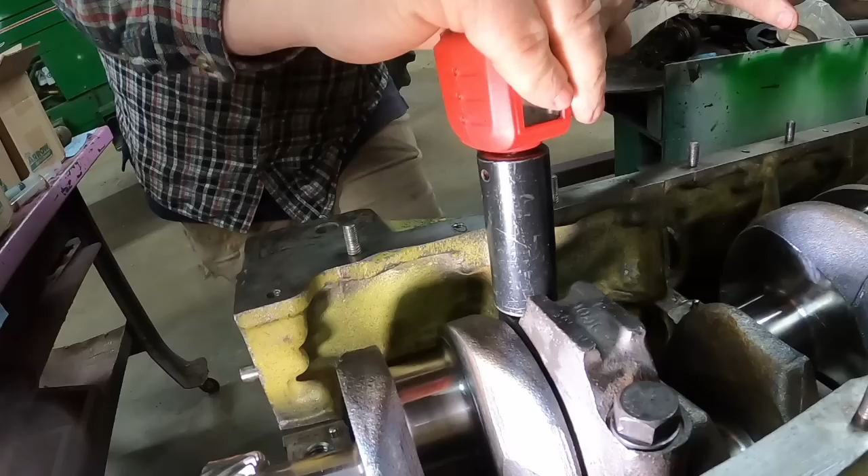I think it works both ways. Got this Plastigage in there. Let's see how much torque it takes to loosen it up. Not as much as it takes to tighten it. Or does it read? Yeah, it reads either way. 111.2 foot-pounds was the max. That's interesting.

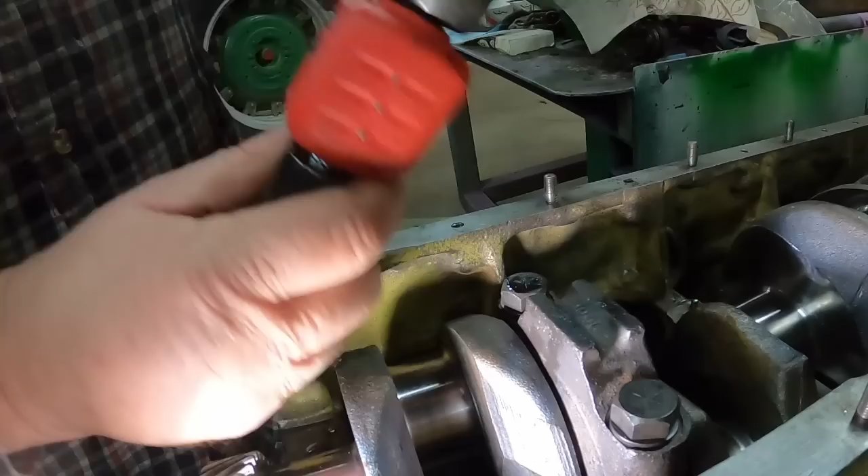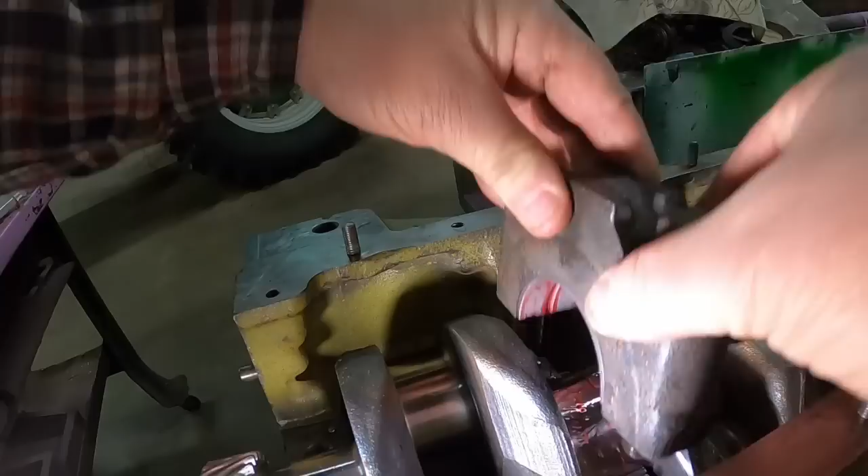Looking pretty good on the Plastigage again. Oops, that's the metric side. And that one's up around 2 thousandths. Same over there. But they want a minimum of 1.5, so we're still good. What I hit, 132. Okay, we'll just keep working. I'll probably go from the front to the back now.

Well, let's see. Those two bearings came in right between the 2 and 3 thousandths like the others. So after each one's in, I kind of like to just rotate it 360 degrees. Complete revolution on the crank. And if it feels like there's a spot that's turning a little harder, if it wasn't doing it before and you put in another bearing, you probably know which one it is. Whereas if you wait to the end and it feels like there's a tough spot, then you got to start working backwards.

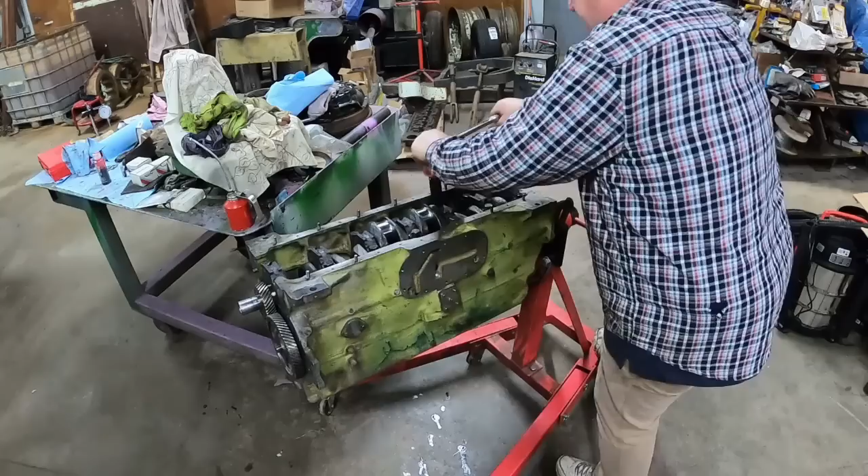And it's turning nice and smooth. Taking a little more effort. I got 4 mains on and this thick assembly lube on there, so that causes some drag, but it doesn't take a lot of effort. So it's starting to look good. Finally. Jinx. I'll just double check all of these just to be sure. The crank is in. Let's give it another spin and see if there's any drag in any spots. And no. Turns nicely the whole 360 degrees. So that is together and ready.

That was a bit of a challenge, but now I can move on to the next part, dropping in the pistons and rods and everything, and starting to check those out. Guess this will be the end of this part.